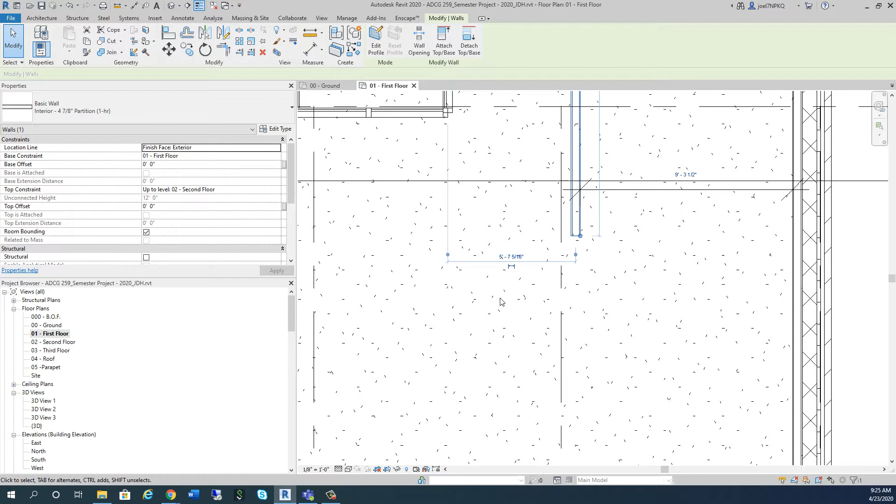So for this storage space, it's going to have a special kind of occupancy as well, and we're going to need some separation because things in storage can be flammable and could catch fire. Now, we probably won't have much that's truly hazardous, requiring a hazard classification—nothing like lubricants, paints, or varnishes.

So we're going to go ahead and lay out some of our corridor space. One thing I have to make sure I do first is click here on this and flip that again, and look at something.

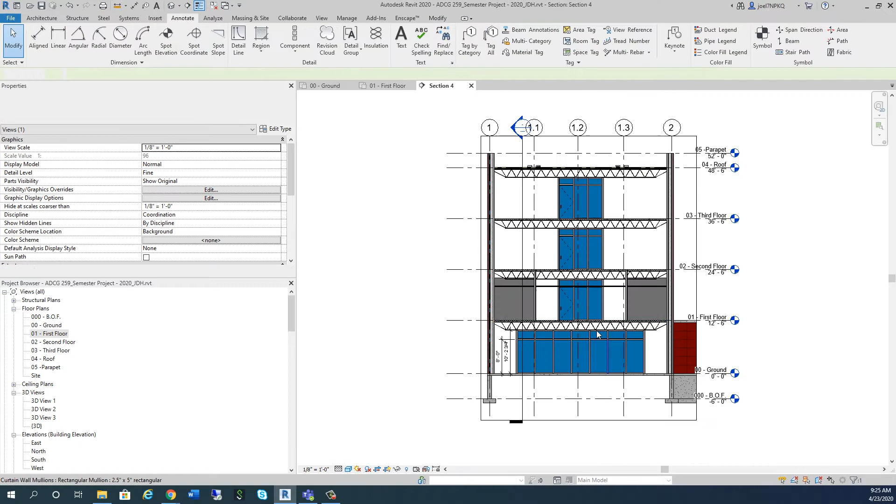So if I'm on the first floor, I've got all these walls going up about 10 feet, and we're hoping most of them are in between the joists in a lot of cases. But in some cases, we know they're going to have to go right up to deck, and we've already handled that—that was weeks and weeks ago.

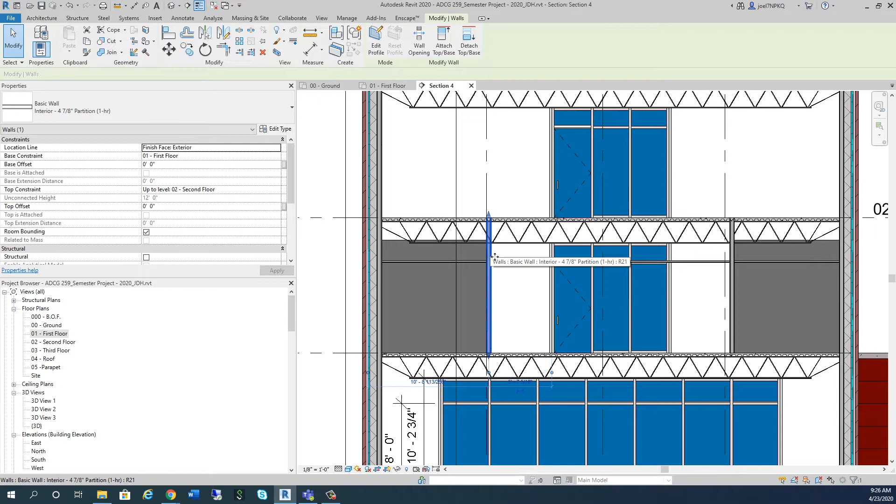We made sure our corridor walls go all the way up. So now we realize we're going to have some problems across here, because look at this—here's a corridor where the labs are on each of the floors, and above it there's this space. So how are we going to handle that? How are we going to handle those walls?

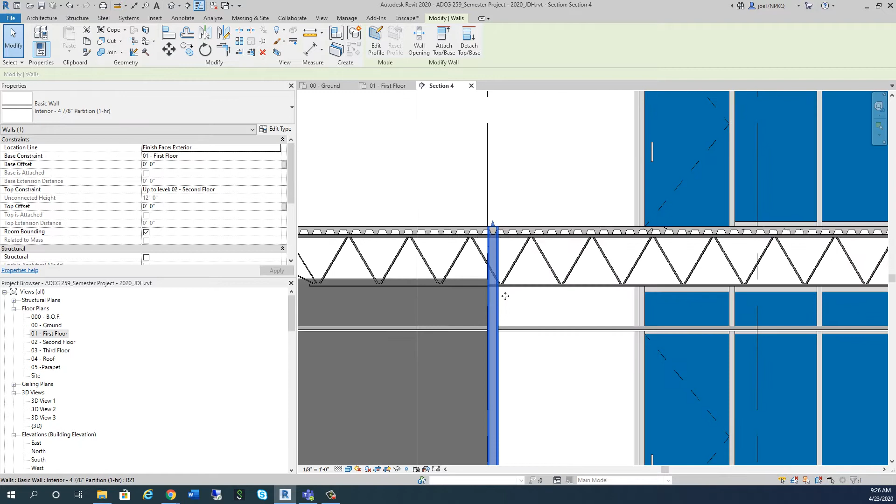What's interesting is I'm going to click here, and try to determine if I'm going all the way up, how much of this type of wall I'll need on this side of the corridor to go all the way up here. I don't want to draw one wall inside of another, and I can't use the curtain or storefront system to go all the way up—I have to protect that because I need a fire barrier here, and you'll see that on each side.

So there's a way we typically do this, and I'm going to try to cheat my way through it a little bit. If I copied this wall right over to here, and then clicked here and said there's a base offset and a top offset...

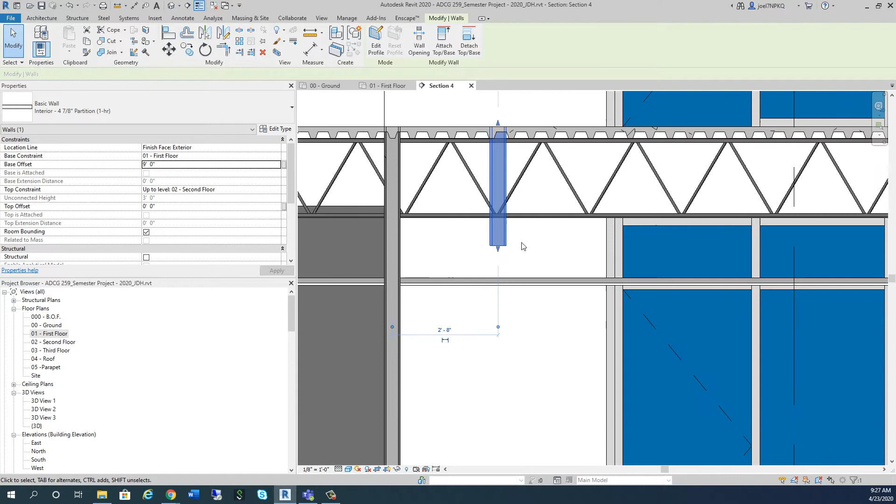What if my base offset—what if I change that to 9 foot? What would happen to that wall? Oh, look at that, it moved all the way up here. Now I can kind of cheat this. Let me move this from here all the way over to here. I'm in good shape now. And then look what I can do with my shape handle.

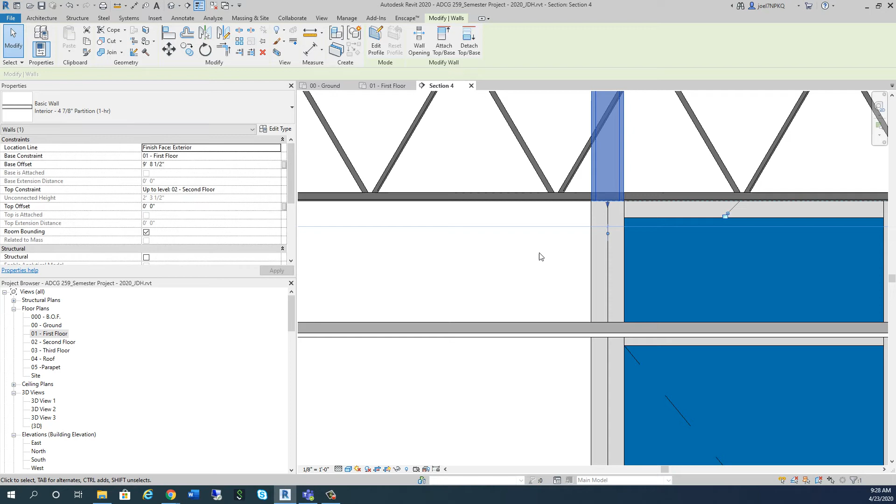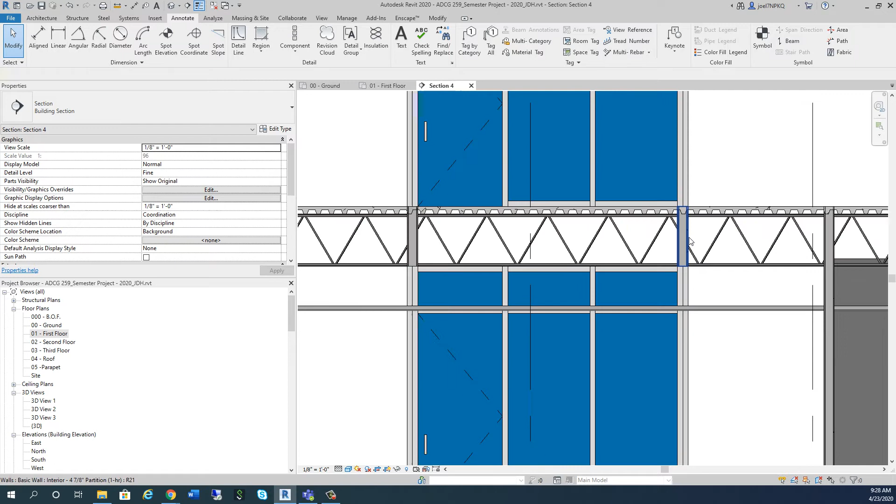I can drag that all the way to the top of there, and now it's saying my base offset is 9 foot 8.5. Look at that—so now I've got that wall on top there. So I'm covered. Now all I have to do is copy from here all the way over to there, and now I've got my barrier up there, protecting fire from getting out.

Now, when I go back to the first floor, what am I seeing? I don't have to worry about it because it's above my view range. That's great—look at my view range, it's at 7'6", so I'm only seeing up to 7'6".

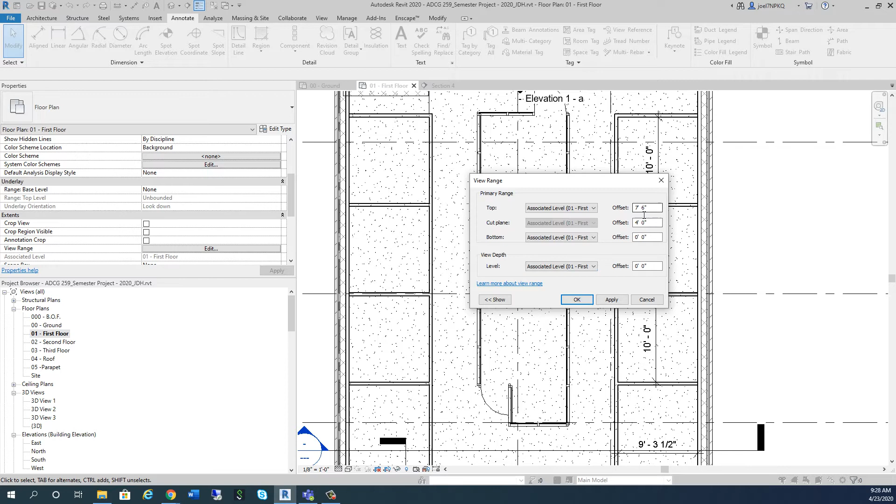And if I go to this section, I know I just created these—the bottom of that wall, the base of it, is at 9 foot 8.5. So I'm never even going to see that, but it's there.

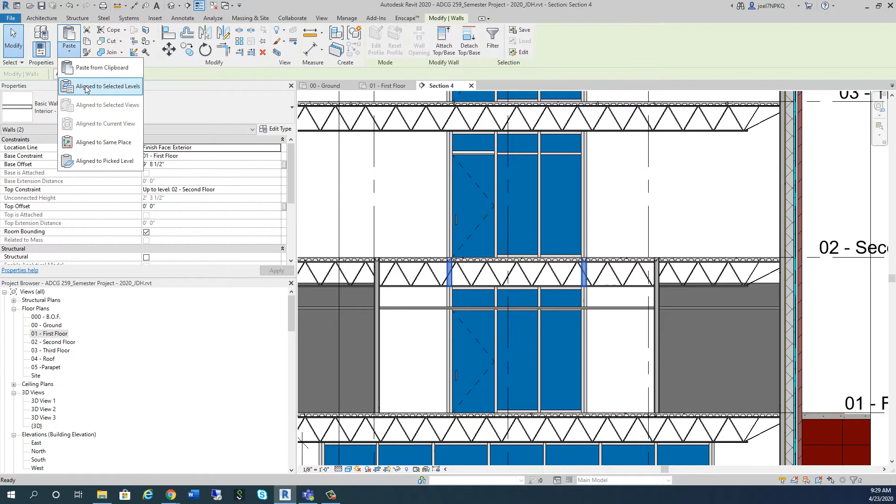So what can I do now? I can click here and here, say copy to clipboard, then come here and say paste align to selected levels. I'm going to say I want it on the second and third floor—and look at that, all the way up my building. That's the beauty of Revit, people. I've got my fire barrier all the way up where I need it now.

Okay, so I am covered. I'm in good shape. I can go back to my first floor. And now on my first floor, I can start thinking about some of the other spaces that we talked about. So now I know if I do a create similar here, I'm going to go right up to that second floor and I'm going to be covered.

So let's lay in some storage space. Another space that we probably haven't thought a lot about, and I'm going to go to the ground floor to talk about this for a second. We're going to have to figure out a way somewhere to create some space for housekeeping or environmental or janitorial, whatever you want to refer to it as. And we're going to create that in a way that is discreet, and we're going to get that in there too.

But what we need is something like that on every single floor, because what we don't want is somebody in housekeeping to have to get water or get a vacuum or get a bucket to mop. We don't want them to have to travel up and down the elevator to get that hot water and get clean water and go back and forth. That doesn't make any sense. So we're going to have some sort of environmental on every floor.

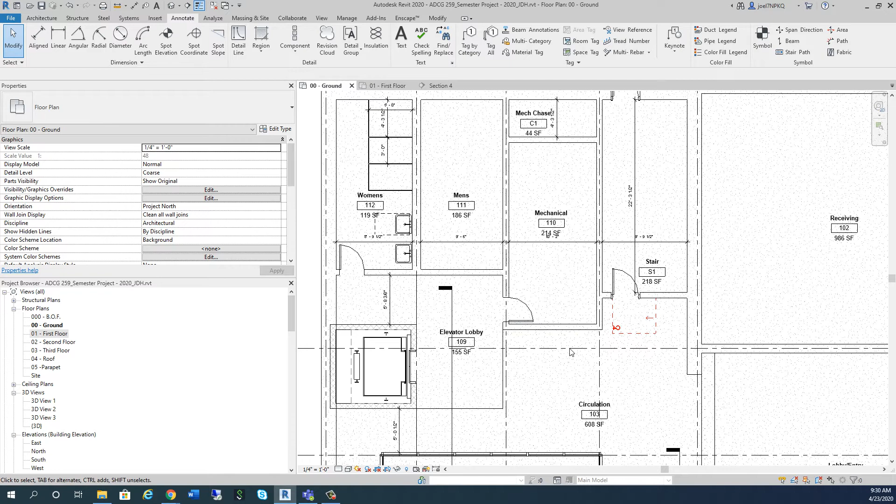And what you're going to find, the plan is to cut that space somewhere out of these areas over here. How are we going to put that in there? Well, you're going to see how we're going to do that. It'll be pretty clever. And we're going to create space for an environmental type of janitorial closet. Okay, so we're going to need that too. We got to think about these spaces.

But now we're back on the first floor. Let's get that storage space in here. So I'm going to click here and I'm going to hit create similar, and I'm going to create similar that wall somewhere over here. I'm going to start here, and I'm going to say I know I need 5 feet for that, right?

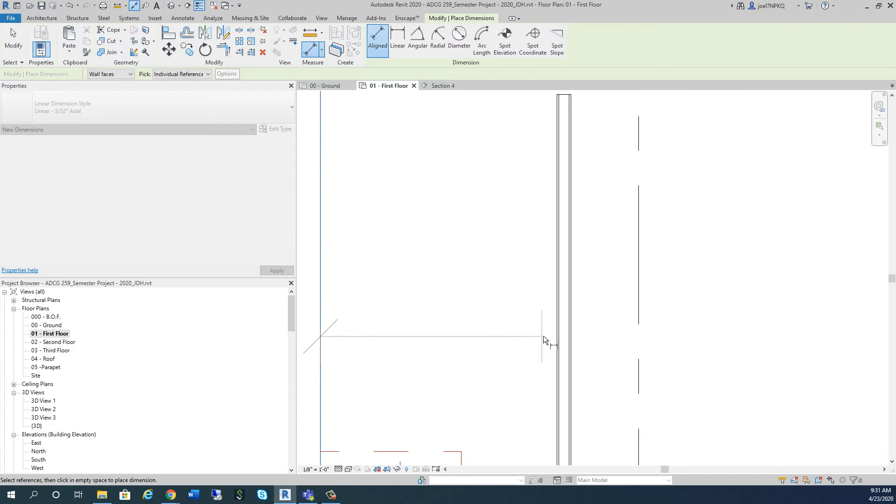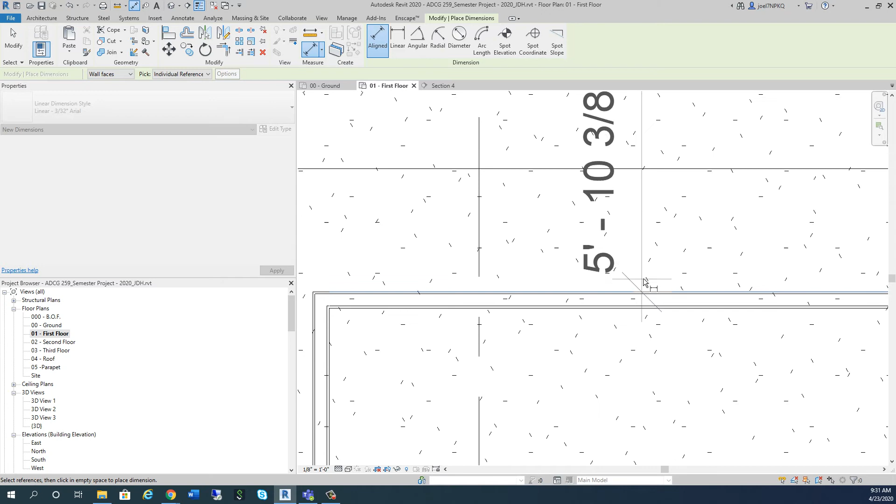So I'm going to get an align dimension and say from that face to that face, 5'10 3/8". I can click that, and now I can say 5'0", right? And then I'm going to do the same thing over here. I'm going to click here and say create similar right at the end of this wall to here, and then I'll trim this off. And I'll say, hey, I need another align dimension here, and I'm going to want this to be 5 foot, right? So now I've got 5 foot in there, and that's approximately where my dimension is going to be here.

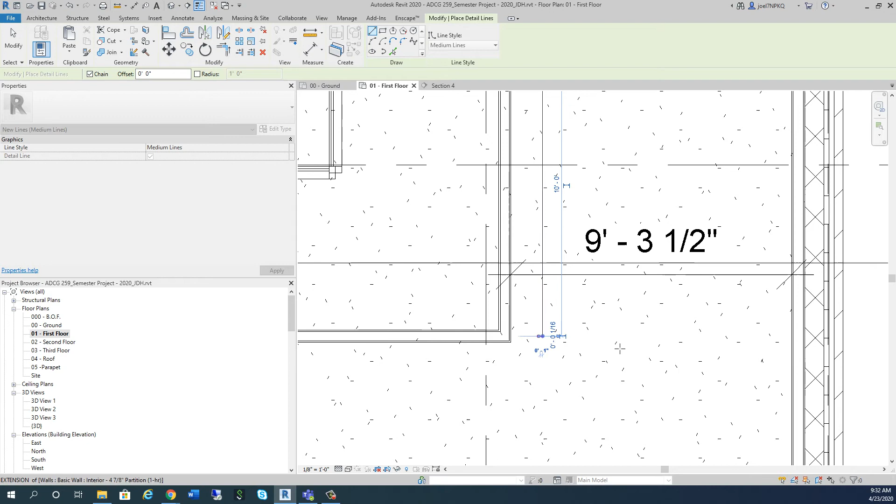Now, if I want to go 10 feet, let's draw a detail line and see how far 10 feet is here, just for grins. So there's 10 feet right there. Right? So if that's 10 feet, that's to the center of that wall, and I want my face to face to be 10 feet. So guess what we're going to do?

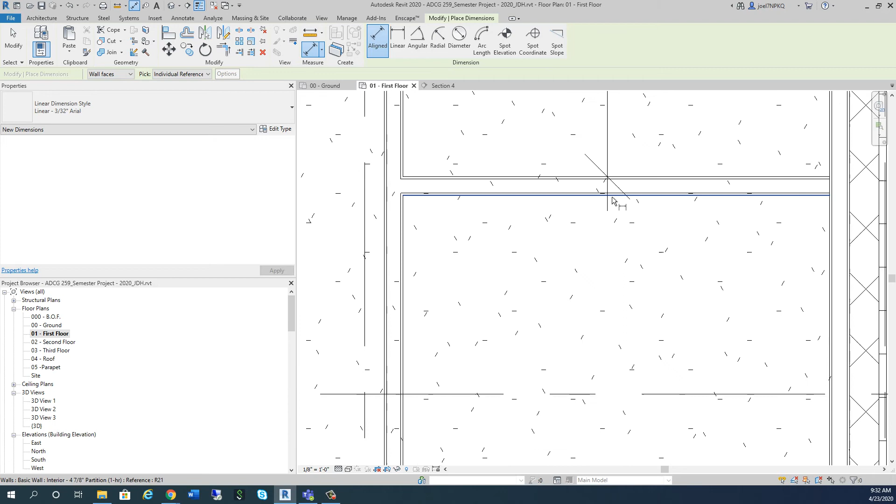We're going to give this person in this corner a little extra space, and that just happens sometimes because we want to keep this even. So what's going to happen is I'm going to pull this wall all the way over to here, right? And then I'm going to put a dimension in here, an align dimension.

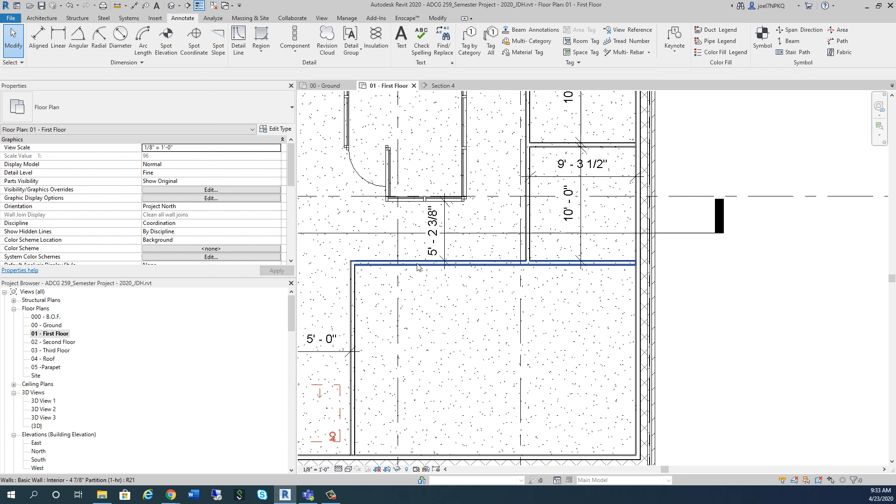And I'm going to say, I want this to be 10 feet. Now that that's 10 feet, I am not going to offset. This 5'2 3/8" is plenty fine, people. As long as I'm 5 foot, I'm fine. If I can keep them all 5 feet, that's great. But it would be more of a hassle to jog this wall up, to come here and then jog this wall up. It would look funny. So we're going to keep it nice and clean, and that 5'2 3/8" is fine.

Or if we really wanted to, we could come in here and change this dimension to 5 foot, but we don't need to worry about it. It's not a big deal. So now we've got space in here for a couple of different things, people.

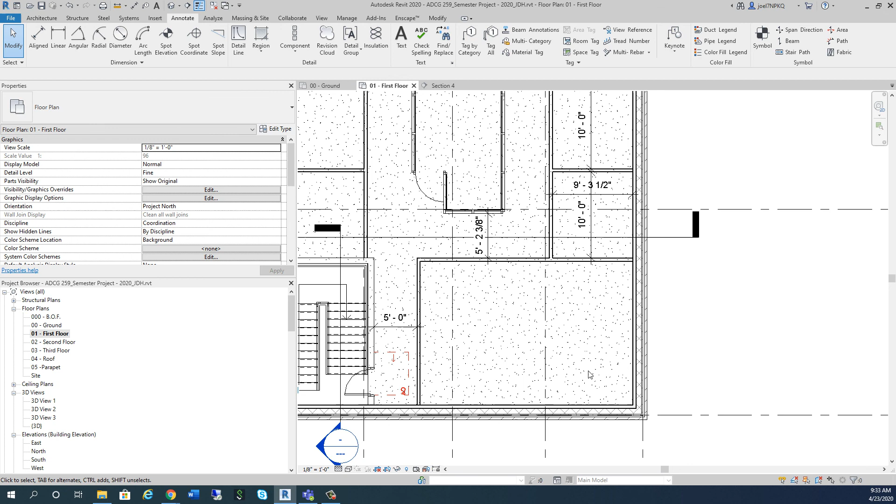What I'll do is when we come back in the next video, we'll talk a little bit more, and I'll let you get a chance to get caught up and get this drawn in there, and maybe even get in the section if you want your fire barriers up above your storefront in each one of these. Okay, all right, so we'll go back here and we'll pick up in the next video.